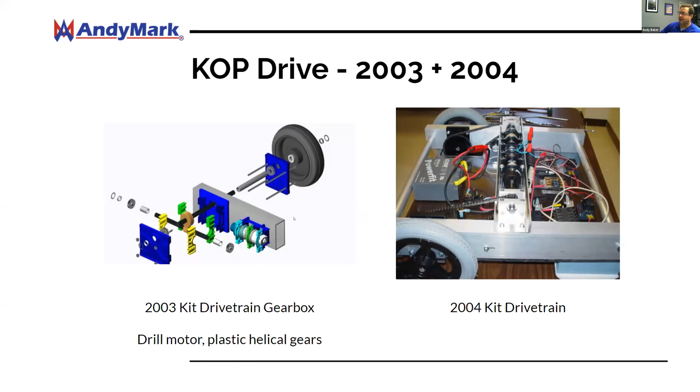So FIRST decided to ask the community to help them provide a kit of parts. So there was one in 2003 and 2004. It used large plastic helical gears that took a drill motor and at a right angle drove a wheel. It used this big tube and these large wheels. It was a 4-wheel drive system. Even though it was a kit of parts, it wasn't very competitive. So the teams with these didn't do that well with them. And so there was still a need to make a more competitive kit of parts.

So back in the summer of 2004, I was in a meeting amongst a bunch of teams, and FIRST came out to the Midwest and asked what we can do to improve. And one of the things that came out of that meeting was we needed standard gearboxes and a standard kit of parts. So it was a collaborative effort managed by Innovation First, the predecessor to VEXpro. And also this was the same year that AndyMark started.

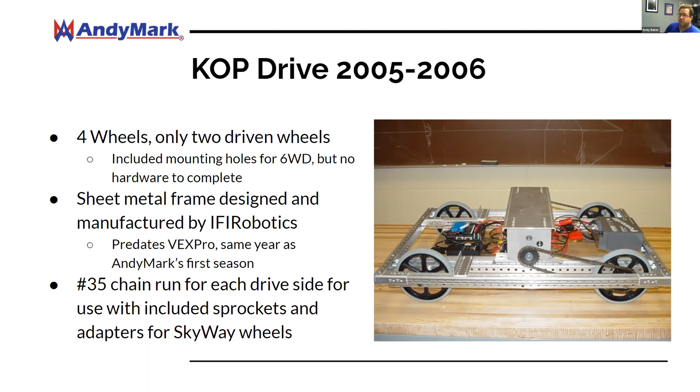It used cast aluminum gearboxes with gears on the inside. The gears on the inside of the gearboxes were supplied by AndyMark. This was our first year of business. The wheels were still Skyway wheels, and the sheet metal was 1/8-inch bent up aluminum from IFI. So 2005, 2006, it was essentially the same thing.

You can see some of the parts there. You can see uniquely the cast aluminum housings. That is a couple iterations before the Toughbox Mini came in. The gears are very similar to the gears now. There's a lot of hex shafting going on here. That was one of the first. That was a novel thing.

It was $150 for a gearbox. That was a lot of money. The overall reduction was 12.75 to 1, and you could combine these gearboxes. You can put them together. You can get some more gearboxes, put those gearboxes together, and it would give you a very large reduction axle for an arm. Some teams did that. There were no multi-stage planetaries that were designed for FIRST style motors back then.

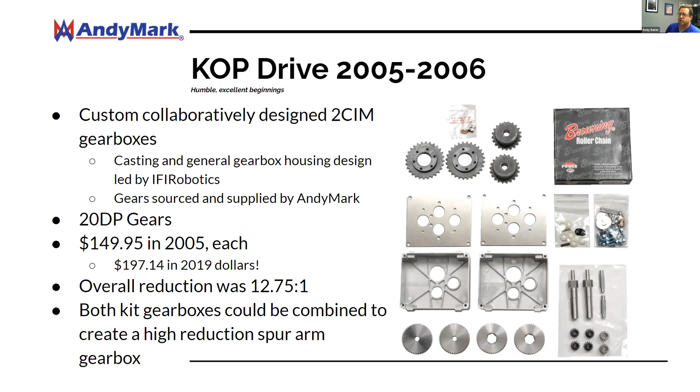In 2007, we at AndyMark and also IFI bid on a gearbox together. BaneBots got the bid for the gearbox. It was a planetary gearbox. There were only 2 that were supplied, and only 1 CIM motor drove each gearbox. So the whole drivetrain was driven by 2 CIM motors.

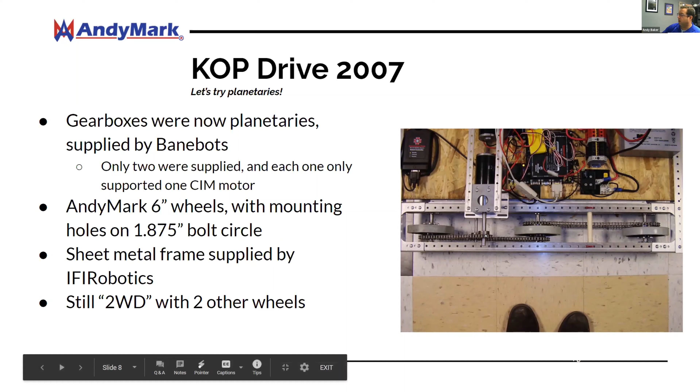This was the first year of AndyMark 6-inch wheels with the fancy, very impactful 1.875 bolt circle, and the sheet metal was still provided by IFI. I don't know if that's true on the bottom one. It's still 2-wheel drive with other wheels. You could drive a chain and drive all the wheels with a chain.

2008, AndyMark, we got the bid. We would bid on these things back then, and we still do. We would bid on the chance of being in the kit of parts chassis. So we got the bid for the Toughbox gearbox within the kit of parts drivetrain, and this gearbox was based on a 2005 gearbox chassis that was the original one, like I mentioned. We also had a product named the AM gearbox back in 2005. Alternate gear ratios are available just as they are today in the Toughbox Mini.

And the kit of parts had a 4-CIM drivetrain instead of a 2-CIM drivetrain, so we're putting more power into the kit of parts chassis. Again, the wheels were supplied by AndyMark, but the frame back then was supplied by IFI. I think by this time they had Vex branded products.

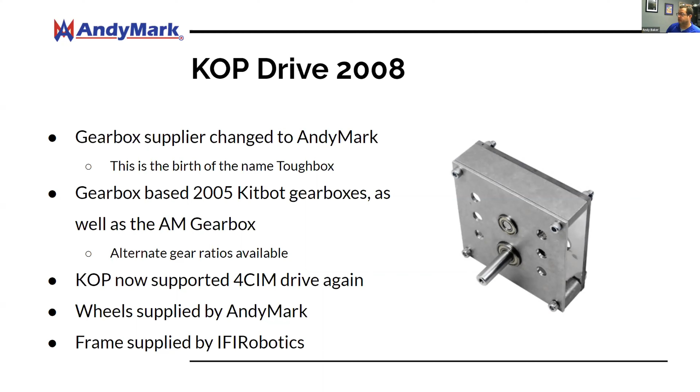2009, AndyMark becomes the supplier of the frame. So we got the business for the frame, and in 2009 we called it the C-Base. This had extruded corner connectors, and it had a C channel structure that was a little bit simpler than Vex's S channel structure, or it looked like a question mark if you look at the side of it.

I remember the day that FIRST called us, and we were under an NDA at the time with this game. They said, we're only going to have 1 wheel available for FRC teams this year. At the time, we're selling Omni wheels, Mecanum wheels, traction wheels with treads, all that stuff. And they said, no, teams aren't going to use those because they're not going to be allowed on robots, but we want you to bid on a slick wheel.

So 2009, we had these goofy white traction wheels that were using acetal white molded material over the hub, because we were going to drive on this really slick material they called Regolith. The challenge of the game was to create a low traction interface between the robot and the field, and it was crazy. It was wild. This was the first year inside the kit of parts we put all the hardware you needed to drive all the wheels. You didn't have to buy extra parts to drive all the wheels.

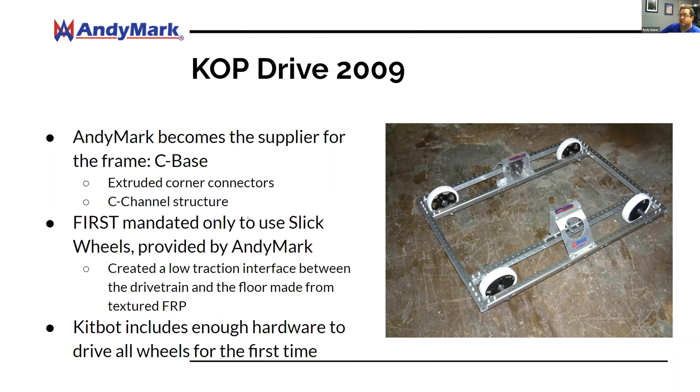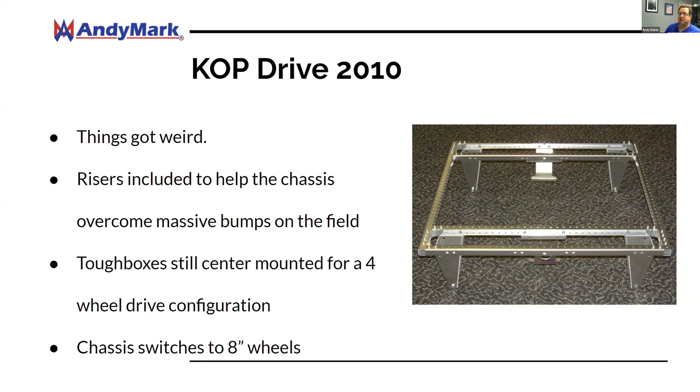2010, things did get weird. We had these goofy standoffs that were like 8 or 9 inch standoffs because the chassis now had to go over these huge bumps in the field, about 16 inches tall, and those risers let the chassis have enough ground clearance to go over those bumps. We still had Toughboxes, and we used 8-inch wheels instead of 6-inch wheels. Those 8-inch wheels we still have today listed on AndyMark.com, even though they haven't been a kit of parts wheel for almost 10 years.

2011, I think we still had 8-inch wheels on the kit of parts, but we did not have those silly extension risers at the bottom of the chassis. We used a different gearbox this year because FIRST wanted to go fast in 2011. The field was fairly wide open. There was a lot of space during locomotion. So we used a simple box, a single stage reduction, and it was really simple to build.

And this was the beginning of the churro, the spacer between the two sides that people use all over the place for things. It was originally called the cross hex nut, and my oldest daughter actually named it the churro. We were at dinner one night, and she thought it looked like a churro, so she named it. Since it was 2011, she would have been in 7th grade at the time.

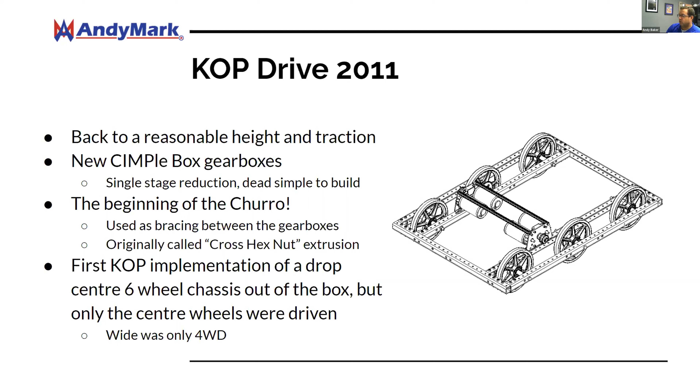2012, we went back to 6-inch wheels, and you could upgrade. Easy COTS upgrade. Oh, I think what this first one means here is we didn't give you as many chains in the kit back then. I think we didn't provide as much hardware back then to drive all 6 wheels.

This was the first wheel for what we call a HiGrip wheel, 2012. But the tread during those years was clear. We didn't put color into the TPU tread on the wheel, so it was a clear, kind of like a foggy clear material over the hub of the wheel. We still used CIMple box transmissions to drive the chain, and back then it was chain, and it was the same basic frame. The C base was the same basic frame that we've used since 2009.

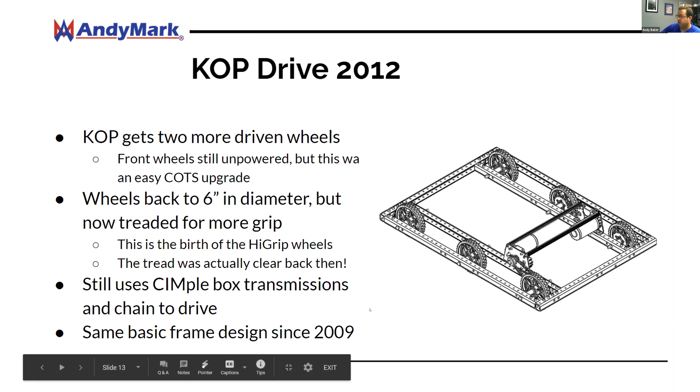2013, we're still using the C base. We started using belts, and first, over the years they changed the rules of the perimeter of the robot in order to keep the designs and the teams on their toes. So if they keep the same exact perimeter sizing in the rules for the robot, then it makes it easier for the teams just to use the same design they did in the years past.

So this is one of those years they decided to make the maximum size of the chassis smaller, and we were able to put hardware into the kit of parts for all 6 wheels to be powered, as opposed to the year prior. And this was a big deal. We switched from chain to Gates HTD style belts.

Over the past 3 or 4 years, Gates was trying to be involved with the kit of parts. They would put belts into the kit of parts for the prior couple of years, and they wanted the teams to use the belts on the robots, and a few teams were using them, but not very many. So we worked with Gates very closely that summer of 2012, and they put these into the kit of parts, and we got them to work.

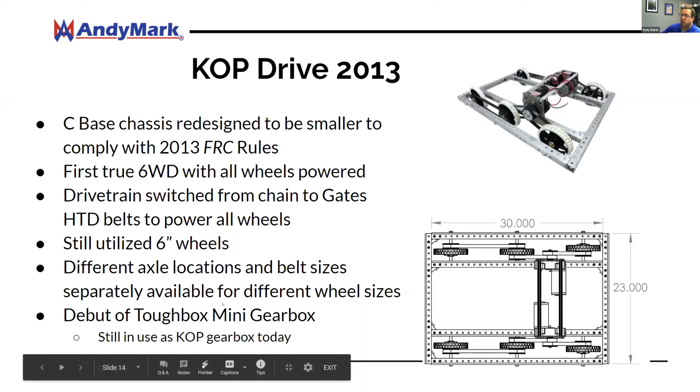We got rid of the cloudy clear material, and we were able to provide different axle locations and different belt sizes within the kit, so a team can make a wide or a square or a long style of kit chassis. The key there was Gates provided the different lengths of the belts in order to make that happen. This was also the debut of the Toughbox Mini gearbox that drove everything, and that has been the kit of parts gearbox as we work up through today's drive chassis.

In 2014, we switched over from calling this thing the kit of parts drive to the AM1 for you. So in 2014, we wanted this to be branded as a chassis for everybody. So it's one for you, one for you, one for you. So that's why we named it that way. Some people say it's the AM14U, and they can call it that, but that's not what we call it. It's the AM1 for you.

It was all sheet metal and extrusion design, and it was a different design compared to the C-base. Some people didn't like it. Some people still use the C-base, and they would buy the C-base from us because they didn't like this change. For this year in 2014, we switched to a 4-inch wheel. There was nothing on the field in 2014 that was a bump that you had to drive over. It was a very flat field, and so we had a 4-inch wheel as the kit of parts wheel.

And we used Gates belts. But also with this chassis, this is one of the reasons why we changed it, we could use different size wheels and shifting gearboxes and mecanum wheels a lot easier than what we had on the C-base. We had more churros involved with spacing between the outside plate and the inside plate, and also used churros across the two modules on the sides.

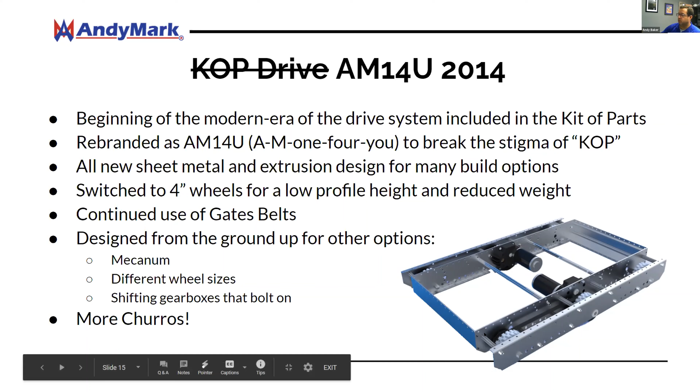Notice the ends were open on the drive chassis modules. There is sheet metal between the two modules, but the ends were open. That was probably the biggest complaint from 2014 from our customers. So in 2015, we fixed that. We took a piece of sheet metal and went all the way across. The side plates were somewhat the same, but because of that revision, we named it the AM1 for you 2.

And it was similar to the original AM1 for you, but the front and back rails were improved. We also heard a lot of people that wanted a flat flange on the top so they can mount things up from that flat instead of a vertical piece. But you can still mount all kinds of things to this. We even put mounting holes in for a BaneBots gearbox to directly drive mecanum wheels on the corners.

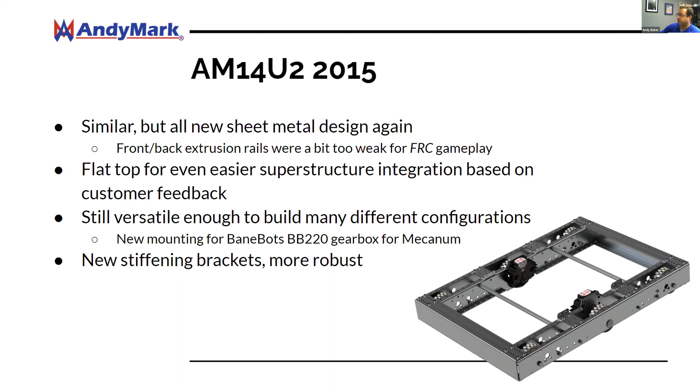It was more robust and it had more stiffening brackets, and we just listened to our customers and made those improvements. The 2016-2018 chassis was a slight improvement over the AM14U2, but it was enough that we thought it needed a rev, so it became an AM14U3.

Better mounting for the Toughbox Micro, which is a single CIM motor or a single motor Toughbox, and it made mecanum wheel solutions even better. And it also included more bumper mounting solutions. So we put more hardware into this kit for bumper mounting. That was a big deal because we think we solved the kit of parts chassis issue, but it was still always hard for teams to make standard bumpers. That's one of the last things that teams have to do to get through inspections at many events. And so we've worked at making bumper mounting as easy as it can get.

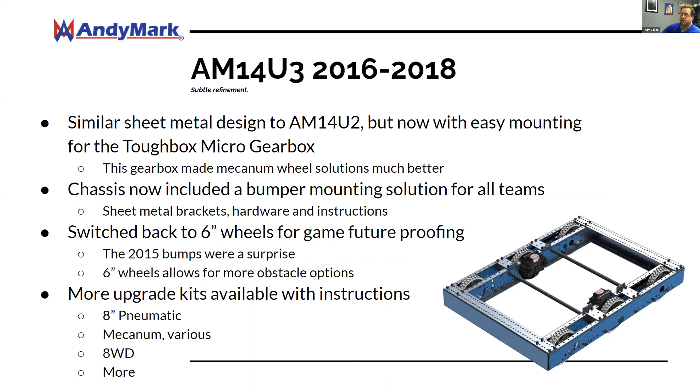And in 2015, we had bumps on the field that were a surprise to us. And so we brought 6-inch wheels back in 2016. And at that time also, I think one of the main reasons why we went to a version 3 was we actually added pneumatic wheels and eight-wheel drive options within this chassis and other types of upgrades that the previous version didn't have allowances for.

And then 2019, we now are at the chassis that was our standard chassis for this past year. It's the AM14U4. The big difference there was we flipped the flanges around on the outside plates or outside rails. And the main purpose of that was to allow for better bumper mounting. This was probably the biggest change since 2015, and it allows people to get to their wheels and spacers. It allows them to mount those easier, and you don't have bolt heads protruding outside the sides of the robot. So bumper mounting does become easier.

No more bumper pocketing needed on the wood to avoid the chassis hardware. So less gaps between your bumper and your rail, because that's a point of contention with inspectors. You can usually have about a 1/4 inch gap between your rail and your bumper. More than that, then it's too much. The compromise or the trade-off there was the inner rail distance, or the entire pocket of the belly pan shrunk by 1 inch. So we took up a little bit more real estate on the side modules, but I think it was for the better.

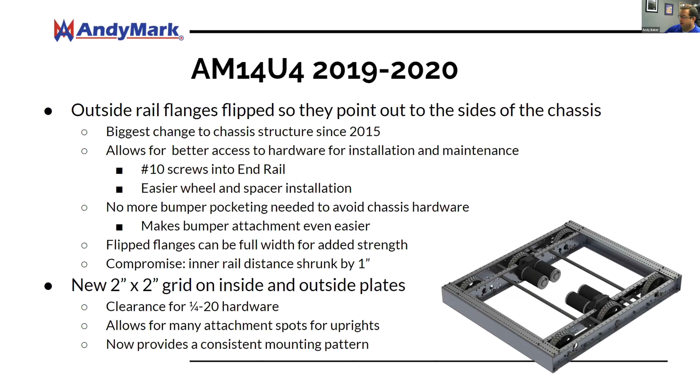We had a new 2-inch by 2-inch 1/4-20 grid on the outside plates, so you could use access holes or mounting holes on planned locations, and you could use that mounting pattern if you wanted to. Some of the other improvements on the AM14U4 was we had a vertical battery mount. The previous version had a laid down horizontal battery that mounted on the end of the robot, and this had a hook and strap thing to hold the battery in place, and also I think for the first time it had a mounting hole to mount the robot side of the SB50 connector, so that the battery would just plug into something that's rigid.

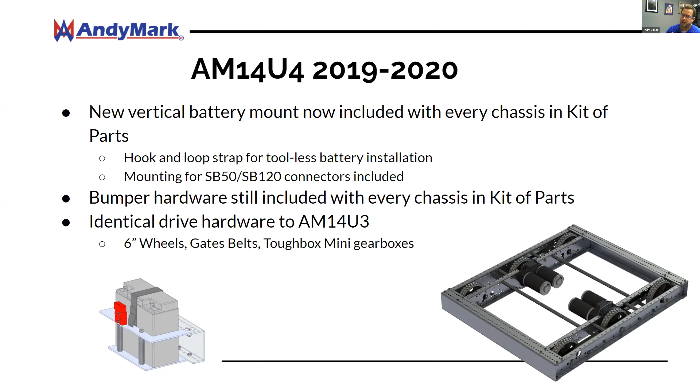We still included bumper hardware into every chassis, and we had the identical hardware for powertrain as the AM14U3, same belts, same gearboxes. A big change for the AM14U4 was bumpers, and we've learned that people in FIRST, if you change something on them, they have to relearn it, and that's sometimes hard. So a lot of these changes that we implemented on the AM14U4, people didn't understand how to use some of this stuff, and that's an us thing. We might not have made our assembly instructions as clear as they should be. Maybe we should have labeled things better. I don't know, but people didn't understand what those brackets did, and so we've done a better job over the past year to make our assembly instructions better.

So there's a couple pictures down here. This is a front bumper, this is a side bumper, and people didn't understand that. If they put the front bumper on the side, it would actually create too big of a gap between the bumpers and the rail. We still put enough hardware in the AM14U4 this past year to put on 2 full sets of bumpers, and the instructions were basic, but we just encourage people to make sure you read the instructions.

I get it. People don't always do that, so they'll call us or they'll put it on. And I remember I was an inspector in Knoxville at the Smoky Mountain Regional, and there were teams that were complaining to me that our bumper brackets didn't work. And like, okay, right here is how we tell you how to use them. You're not using them right, but I'm not totally blaming them. We're just not getting the message across.

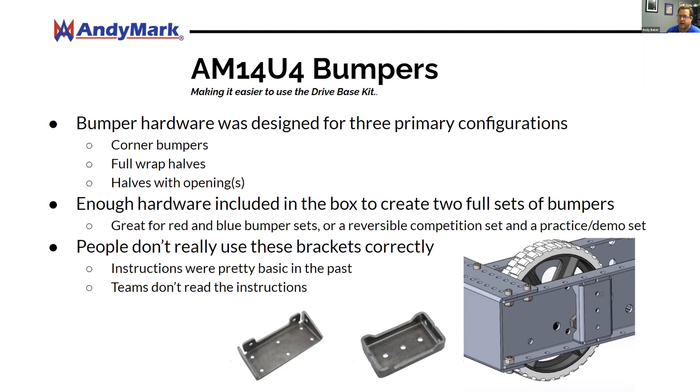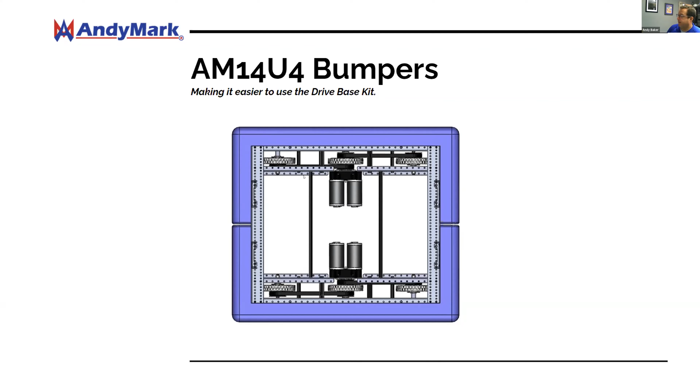I prefer a bumper setup that's the entire length of the robot, or the entire perimeter of the robot, unless you need like an intake to pick up a ball or something like that. And then in that case, you have a gap in the front of your robot. So teams would then cut this front rail here, and then they would put something else in here to bridge the 2 side modules together.

In this case, we do have a cross member here that is a standard part in AndyMark that works pretty well. I do a lot of robot inspecting at a lot of different events wherever I go. And the first thing I look for on teams' robots, no matter if they're using an AM14U4 or some other chassis, is this bumper or this length of their frame right here. If it's less than 6 inches, historically that has been against the robot rules. Robot rules are written so that this length has to be at least 6 inches.

So many times if it's close, I'll just pull out a dollar bill, which is 6 inches long, and I'll put it there and I'll say, oh, okay, that needs to be a little bit longer. Here's the rule, whatever. So this chassis allows for that. You just got to cut this piece down to 6 inches.

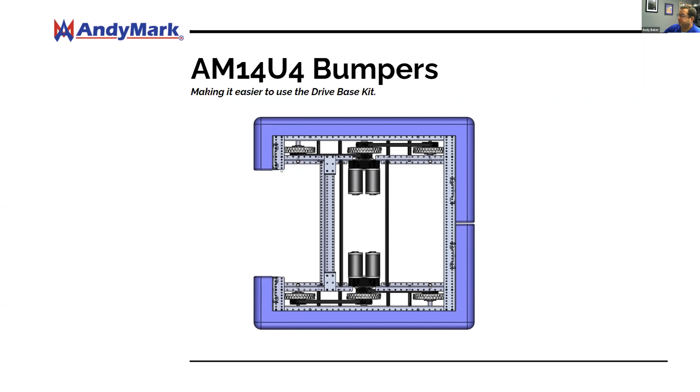In order to mount bumpers, there's #10 clearance holes on top of the surfaces of the AM14U4. There's 1-inch holes along the rails, and there are half-inch pitch along the front and the back, and then the pitch between the depth of the two holes in the front and the back is 1 inch. So there's a lot of holes you can use to mount stuff. So you can use those standard brackets to put them in a lot of different places. There's not just one place.

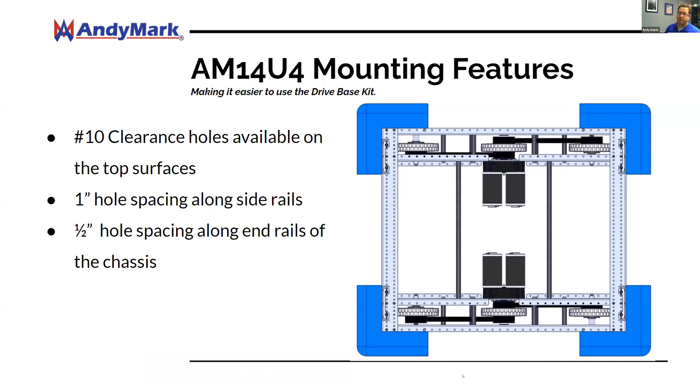Well, I mentioned one of the improvements of the chassis was to have these mounting holes, these 2x2 patterned 1/4-20 clearance holes. Some teams were asking for that. A lot of teams mount things on the inside of that plate and they go up from there. So those holes were an improvement over the past design.

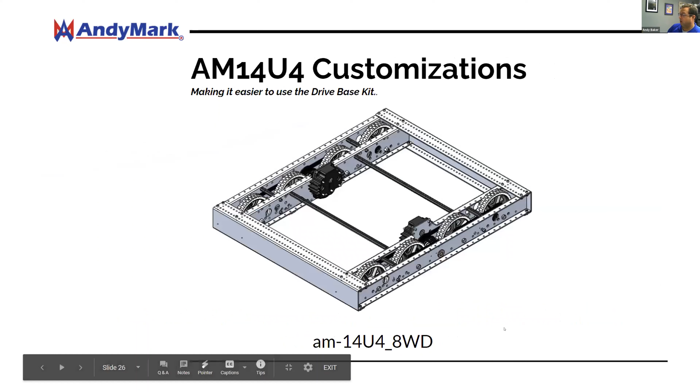Oh, also notice those holes are mounting holes that exist on the inside and the outside rail of each of the modules. So you can put churros wherever you want them to be, or you can put hinges or brackets or structure coming up from there, however you want to design it.

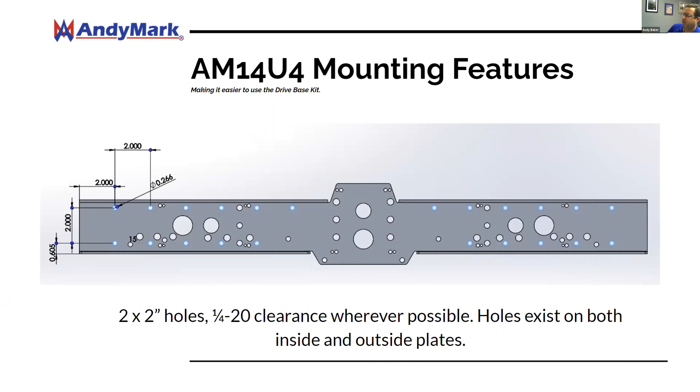One of the great things about the AM14U4 that the teams take advantage of is what we call customizations, but they're using standard parts to make this chassis different than what comes in their blue box as their kit of parts chassis. They can do a lot of different things. They can do 8-wheel drive, pneumatic, mecanum. They can do a different type of wheel.

They can have an omni wheel on the corners. They can have performance wheels or higher traction wheels. They can use different companies, brands of wheels to put in there. And this thing is fairly modular in order to do that. Also different gearboxes. They can put shifters on here. It's very what we call customizable, even though those are standard off-the-shelf parts they're using with this chassis.

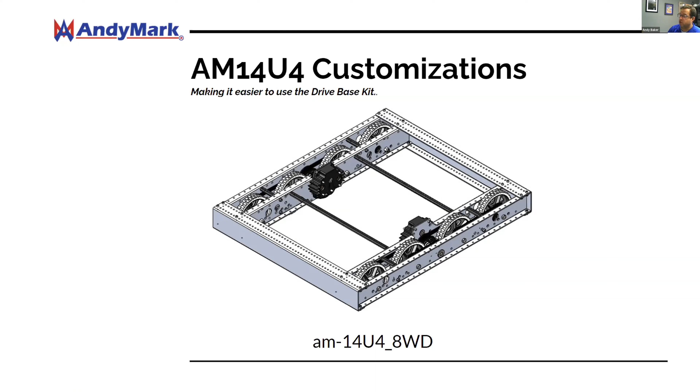So this picture shows an 8-wheel drive system. On my team, I work on Cybertooth as a technical mentor. This is what we've used at least the last 2 years, I think it might have been the last 3 years. We've been using 6-inch wheels, 8-wheel drive. The team would add 2 wheels to the chassis and add different sized belts to the chassis. And there's a product package that we have at AndyMark that identifies those items.

Another customization is to use mecanum wheels. You can use 6-inch wheels, 4-inch wheels, and also 8-inch wheels if you want. There's room in there to make that work. The 8-inch wheels are wider, so I think there's some different spacing between the rails that you have to make wider for that, but it works.

This standard uses the Tough Box Mini gearboxes. You can kind of see them on this drawing right there. Each one has its own gearbox. Each one would have its own motor, be it a CIM or a Neo or a Falcon or whatever.

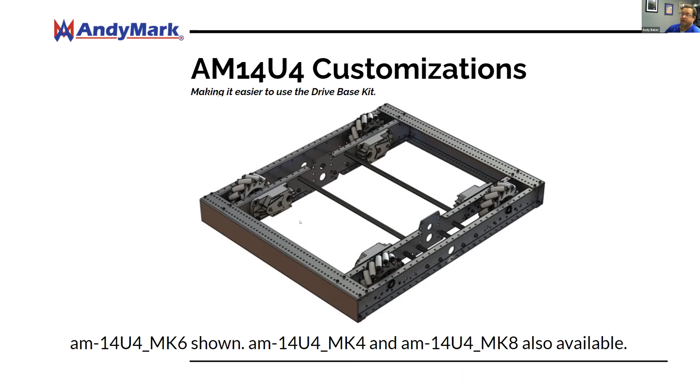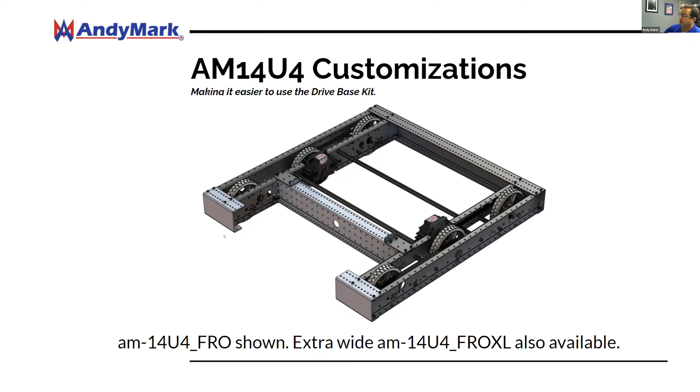You can also buy a kit. We have kits that give you a front opening, and it gives you these brackets and this cross member, and there's kits to make it wider. And people have asked for this, so we put together a standard kit for it.

So a lot of teams use these, and it provides a lot more, I guess, shock absorbent capability for the chassis, because now there's compliance. There's a lot of compliance within pneumatic tires compared to a high grip wheel.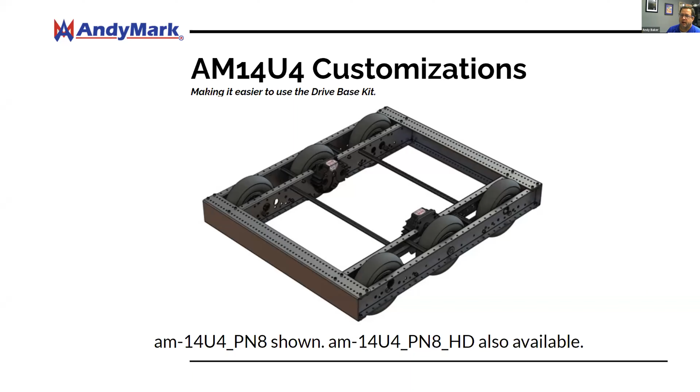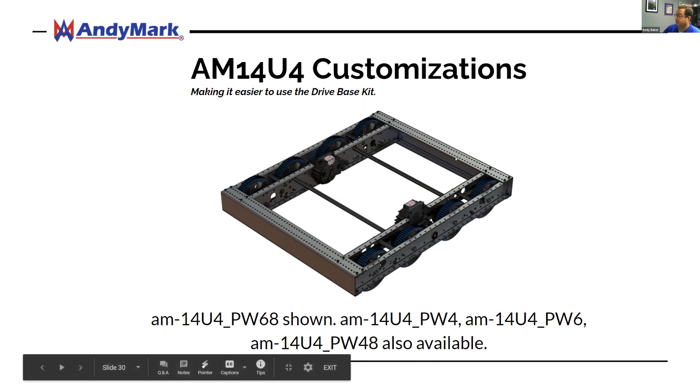What is that one? Oh, that's an 8-inch. Sorry, that's an 8-wheel drive, 6-inch performance wheel setup for the chassis. It's kind of hard to see some of these. The drawing isn't very good. Sorry about that. But those are different options that you can use, and these are all on our website. So there's shifters that you can add to it. There's all kinds of different customizations that we put into bundles that people want to use.

And I think this is probably one of the most underutilized things that teams might not realize. I don't see many teams with 8-wheel drive systems. Probably the biggest complaint that we get from veteran teams about the chassis is it rocks too much. It has the drop center wheel and it rocks.

So if they're trying to use vision, or they're trying to shoot something, or they're targeting something, and their arm might move, or someone hits them, the robot will rock a little bit because those center 2 wheels are dropped. And that all can be fixed if they just add 2 more wheels and make it an 8-wheel drive, and it doesn't rock as much at all, depending on your center of gravity, if you have 8 wheels versus 6 wheels.

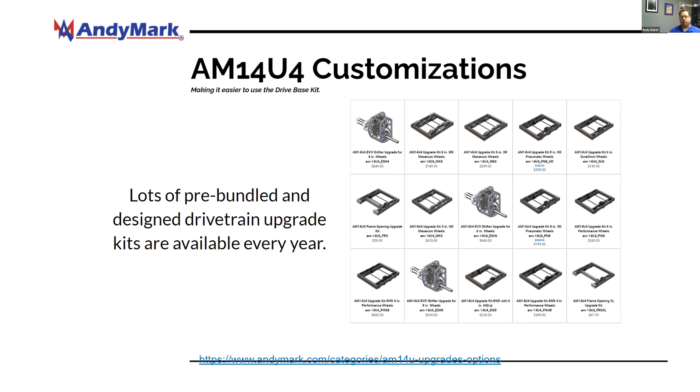There's a lot of teams that use our chassis, not necessarily for their competition robot. So I know of veteran teams, like world championship veteran teams, who still use our chassis, and they still get it in their kit of parts, but they don't show up at their regional or their district event with that chassis as their competitive chassis. They have their own design. They want to use their own design. They believe it's better than the kit of parts chassis, and good for them. That's fine. But they use our chassis to train their new students on how to build something.

They might make a defensive robot, or they actually have a big enough team where they train their younger students how to work with a kit of parts chassis, and then those students go out and help the younger, lower resource teams at an event, and they can help debug their robot to make them more competitive on the field, because they're probably alliance partners with the high resource team that owns the chassis that they don't use on their robot.

Also, a big deal that teams might not realize is this saves time and money and all kinds of other resources if they're working within the typical build season of an FRC challenge. Right now, because of COVID, it is build season right now. It has been since January of this past year. So this doesn't apply to this year. But as we go forward in future years, I bet FIRST is still going to give us a limited amount of time, limited amount of resources to build these robots, to play these games.